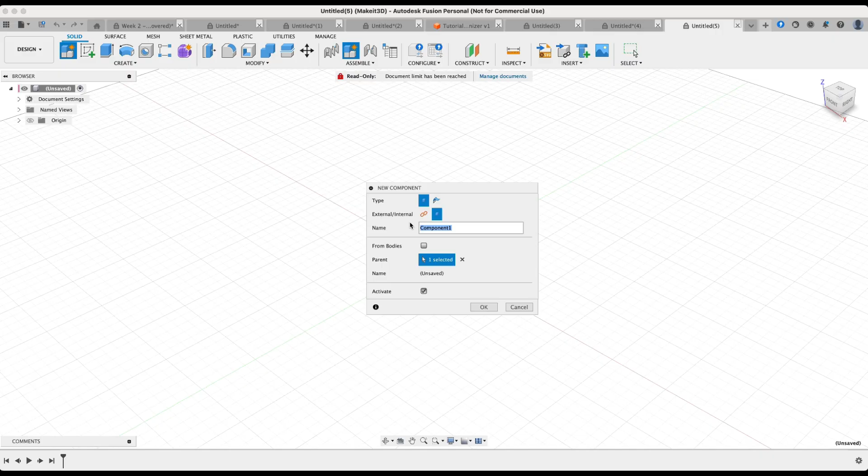Okay, so to get started with this design, the first thing we want to do here is hover over to the left hand side, click on Create, New Components, and let's go ahead and name this component to construction cone and press OK. The next thing we want to do here is draw a quick sketch. To do that, we can hover over to the left hand side, clicking on Create Sketch, then selecting the front plane here. From here, what we want to do is to create a center rectangle.

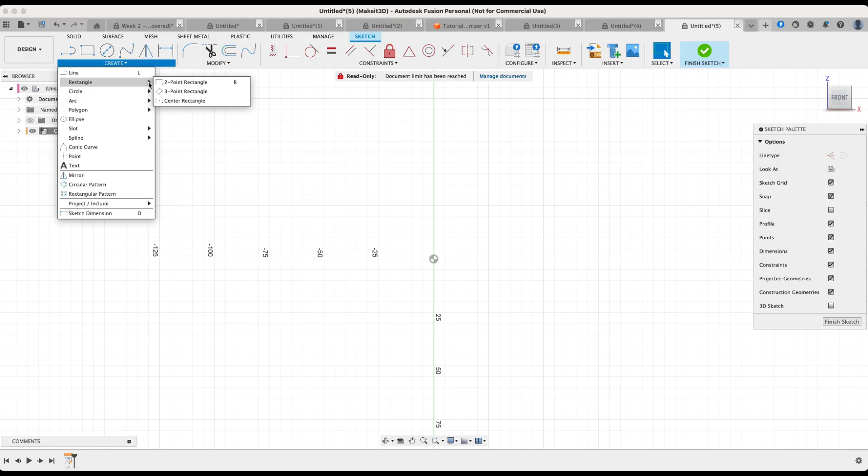To do that, we're going to hover over to Create, Rectangle, then select Center Rectangle. What this allows us to do is basically draw out a rectangle from the center point wherever we select within our canvas. So from here, we're going to draw out a center point from the origin and then just drag this out with our mouse.

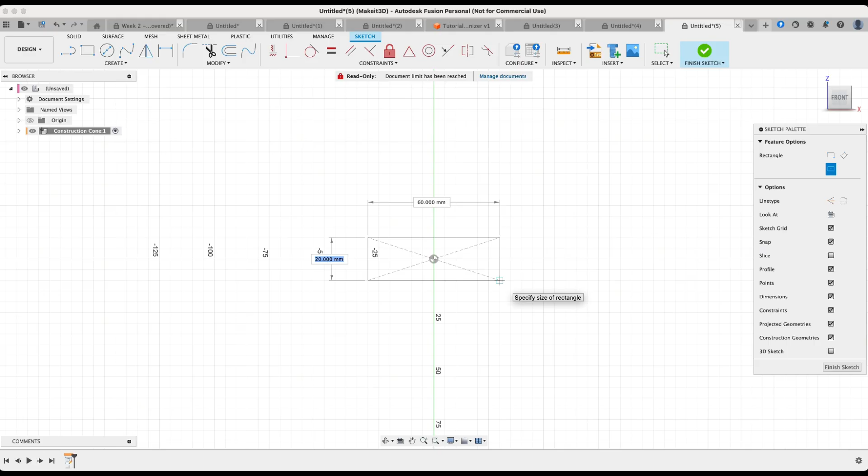Now on screen, you'll be presented with two different dimensions. The one as shown on the left and one as shown on the top, which is basically the width and the length. You could toggle tab on your keyboard to switch in between the two. I'm going to change the one on the left to around 2.5 millimeters. Pressing tab on my keyboard, which switches to the one on the top, I'm going to set this to around 40 millimeters. Once that's done, I'll press enter on my keyboard, then click on finish sketch.

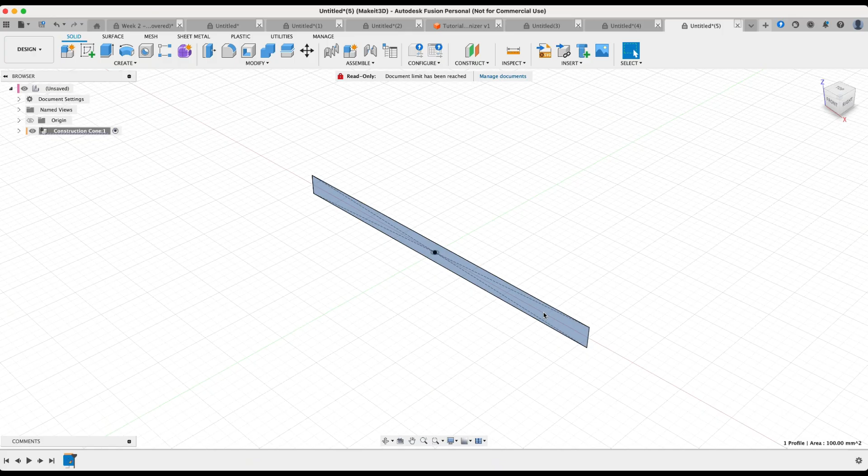From here, let's go ahead and zoom right into our canvas, selecting the profile which we created, pressing E on our keyboard, which basically allows us to extrude this profile, and you'll be presented with a couple of different options. The first thing I want to change here is the direction. We're going to change the direction from one side to symmetric.

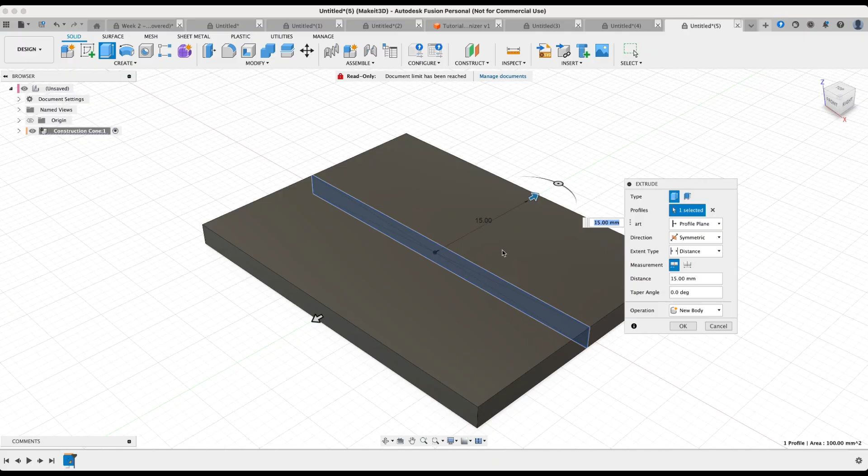This basically allows us to drag out this arrow on screen, and both sides will also represent the exact same value, meaning that if this is shown on the right hand side 15, on the left it will also show 15 as well. I'm going to stretch this out to around 20 millimeters and press OK. Once you have your value set to 20 millimeters, press OK on screen. And now you have a new solid body shown within Fusion 360.

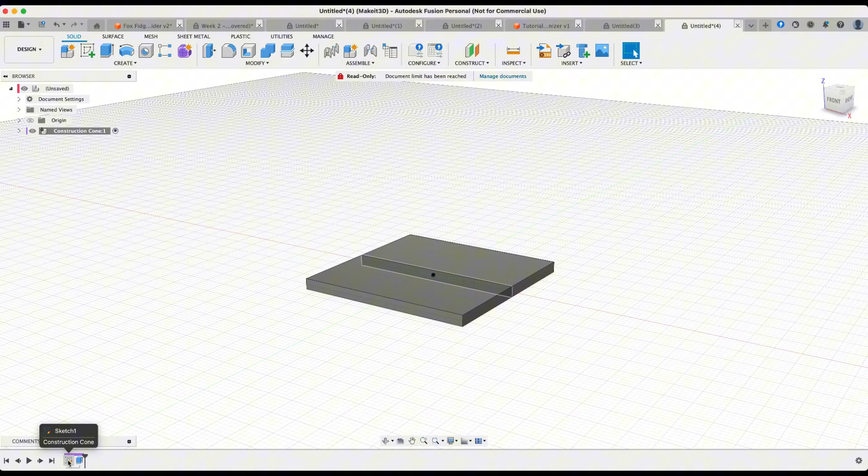The next thing we need to do here is to create the cone portion of our design. To do that, the first thing we could do here is double click on the sketch menu shown on the bottom left. Now, the cool thing about Fusion is that you can actually go back in time by double clicking on a previous feature that you added. Double click on this. And then the next thing we want to do here is to create the shape of our cone. To do that, we're going to use the line feature within Fusion by selecting line on the top left-hand corner.

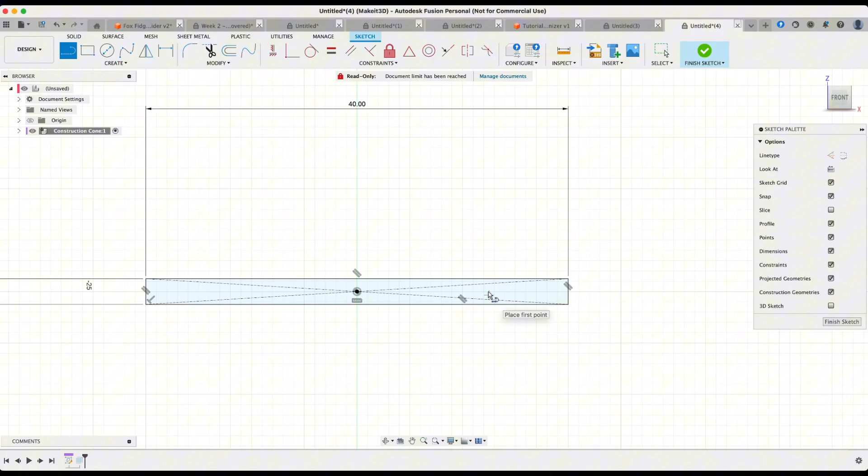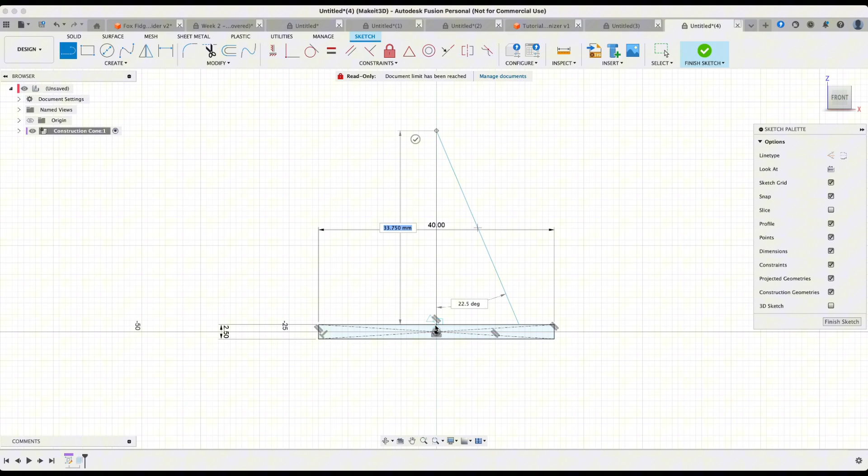Then from the bottom, what we want to do is drag out or draw a line anywhere along this path here. Selecting this line here and kind of just bringing this up to the very top. Now, it doesn't matter how high, we'll go ahead and set the dimensions later, but I'm going to set this to directly in the middle as shown on our green line here. Then dragging this back down all the way back to the bottom and press OK.

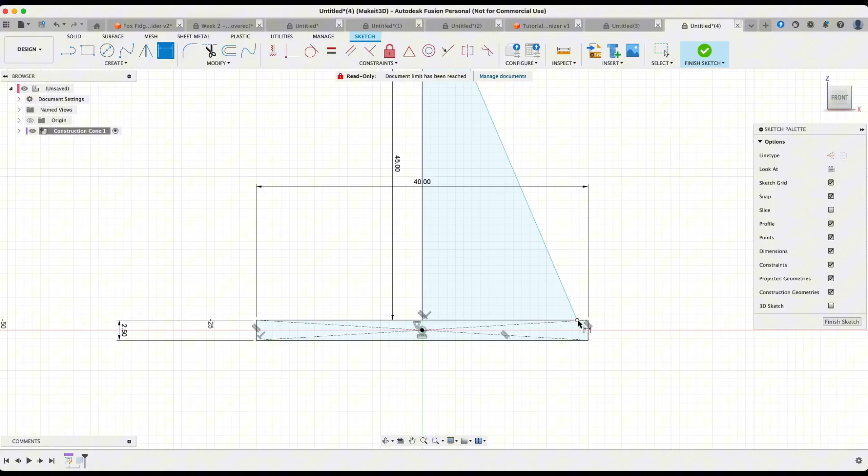From here, the first thing we want to do here is dimension the tallest line here. Pressing D on our keyboard, selecting this line here, and what we want to do here is set this value to 45 millimeters. The next thing we want to do here is set a dimension between this dot shown on the bottom right hand side and this edge here. Pressing D on your keyboard, selecting the bottom dot here to the right hand side, then let's set the value here to around 5 millimeters.

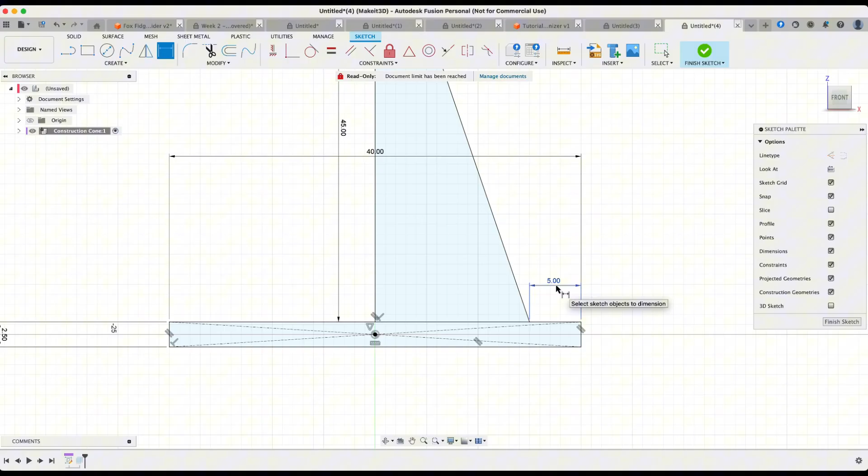What we've essentially done is set the distance in between this dot to this edge here to around 5 millimeters, then also creating a certain amount of height for the top or the largest line here. So that way we get an estimated or a much more proper size for our cone here. Now with that done, the next thing we need to do here is create a fillet because cones don't have a sharp edge at the very top.

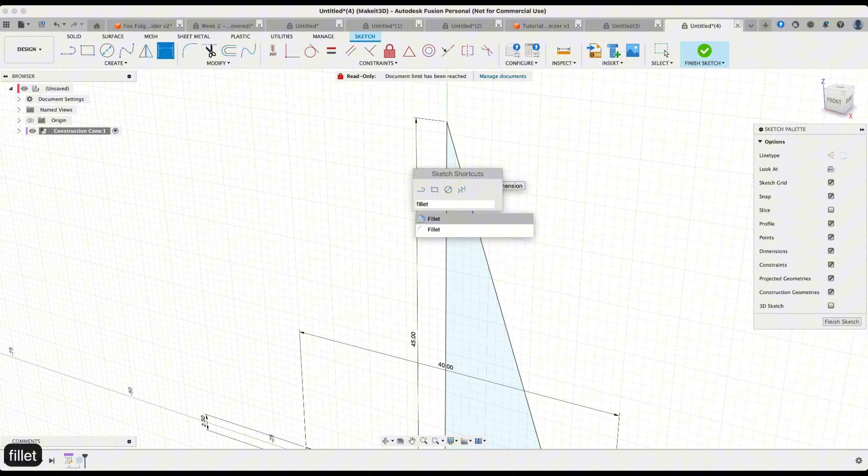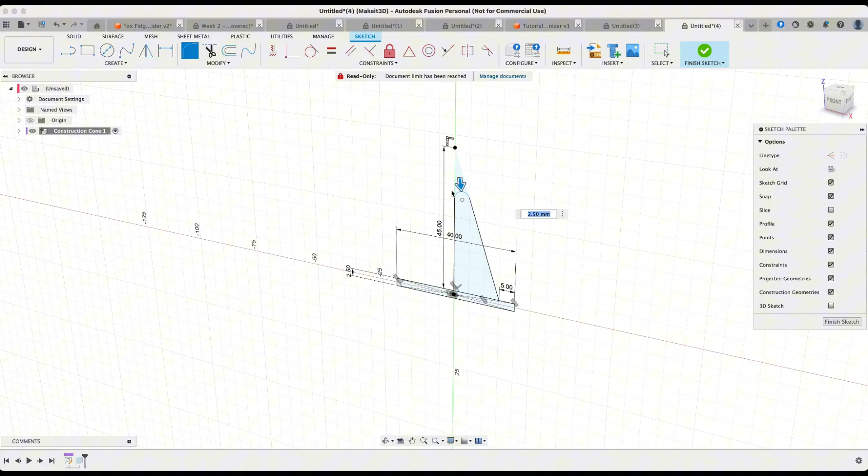To do that, we can press S on our keyboard, then type in fillet. We're going to go ahead and select the second option as shown as this line with kind of like a bluish curve here. Then selecting the top two lines here as shown on screen. And you should see that Fusion 360 might automatically change or move your fillet somewhere along this canvas. If it does, you can just move this arrow back up and kind of fix it so that way it doesn't stay all the way down there.

I'm going to set this value to around, let's just say 1 millimeter. Press OK. Now with that done, we can click on Finish Sketch. And now using this profile, we can press S on our keyboard, type in Revolve. And this allows us to select this profile on screen, select the axis.

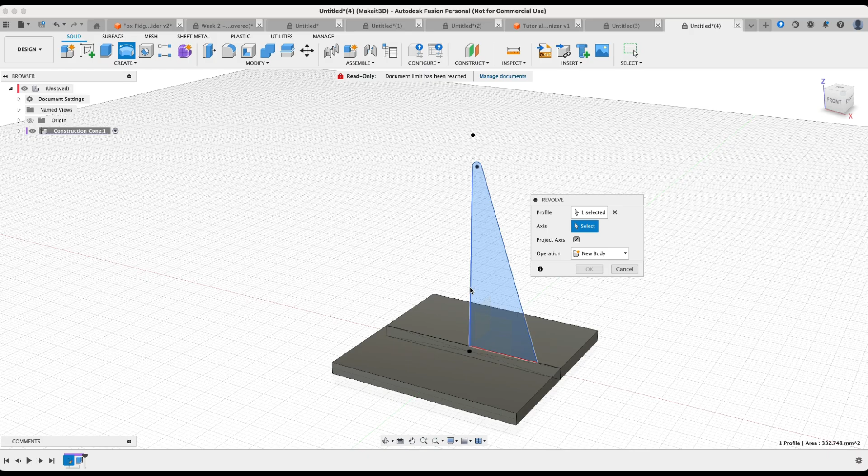We're going to use the green line once again, or the line here. And now we're basically able to revolve this profile, this 2D profile, into a 3-dimensional body. Once that's done, press OK. Now with that completed, we can go ahead and hover over to the left-hand side, toggle on our construction cone, toggle on sketches, and then turn off sketch 1.

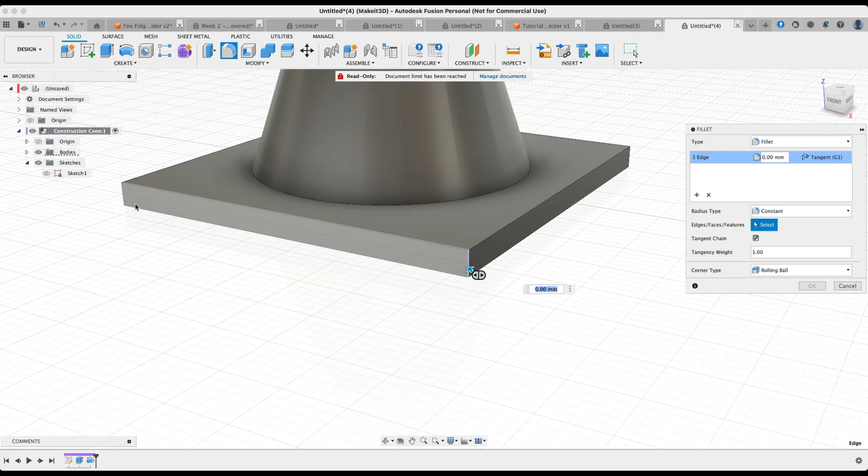Lastly, let's go ahead and add a fillet to each of these corners here shown on screen, pressing F on our keyboard. And what I want to do here is select each edge along our square. And I'm going to fillet this in to, let's just say, around 3 millimeters.

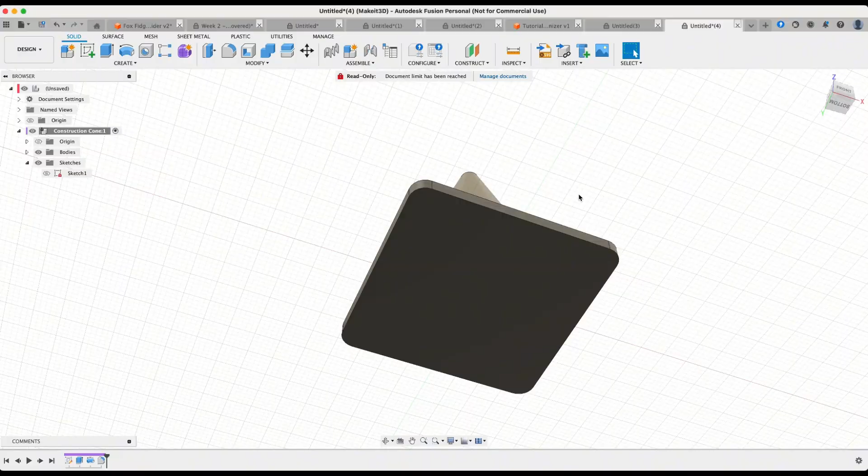Now with that complete, the next thing we need to do here is to create some sort of shell inside so we're able to stack the cones on top of each other. To do that, we're going to press S on our keyboard, type in shell, then select the blue icon here. From here, we're going to select the bottom face, and what this allows us to do is to basically create a cutout or an inside thickness, specifically inside this face here.

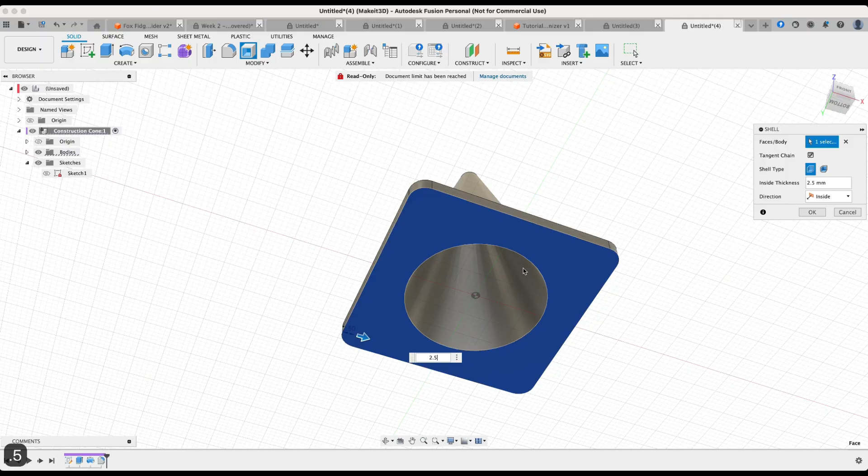I'm going to set the inside thickness to around 2.5 millimeters. Once that's done, it's basically created a cutout or an opening for our design, which looks good to me. Press OK. Lastly, the next thing we need to do here is to create some sort of offset. Now, the reason why we need to create some sort of offset is because just imagine if we were to try to stack these cones on top of each other.

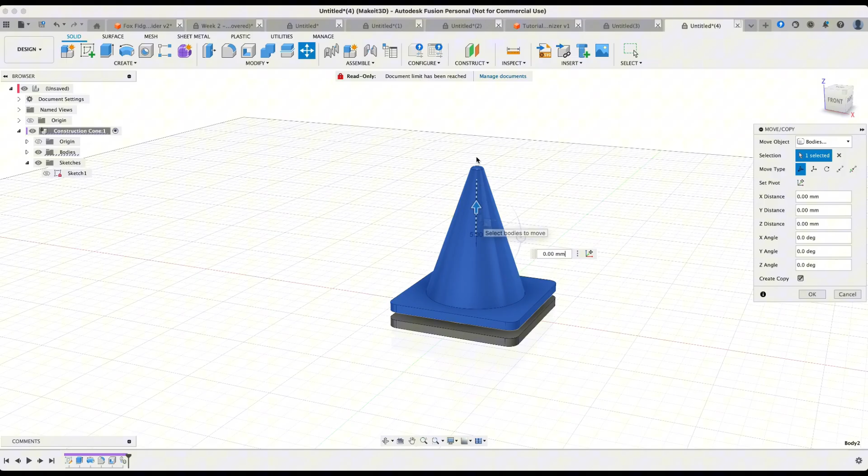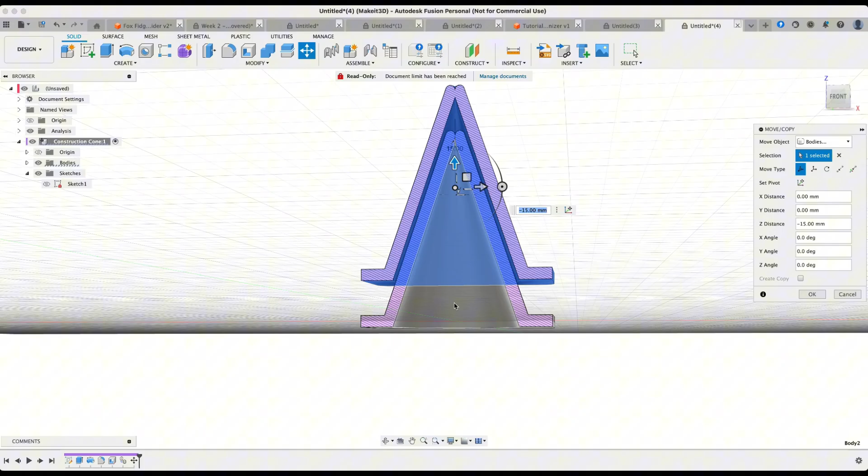Now, as an example, I'm going to go ahead and duplicate this cone myself. And as you can see, if I were to duplicate this, create a copy, then create some sort of section analysis, you can see that we want our cones to fit as much into our design as possible. But this leaves a lot of space in between here. Now, to fix that, we can actually use some sort of offset and press pull this, so that way you can create much more of an opening inside, so there's not that much space in between the two parts.

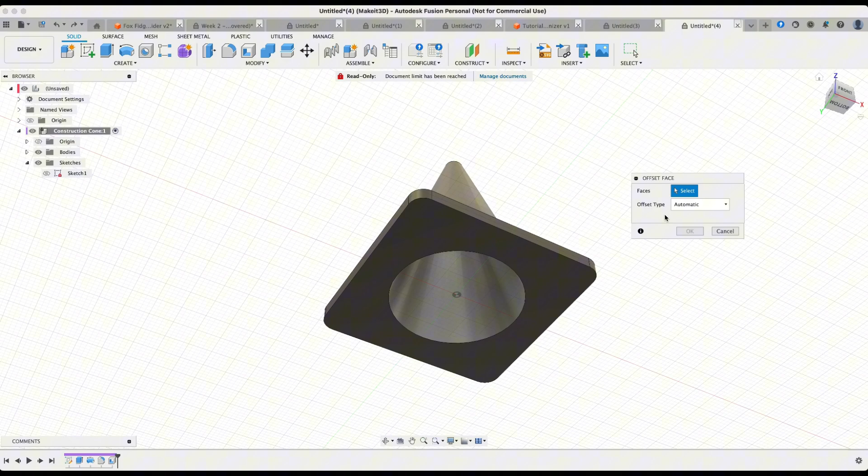To do that, what I'm going to do is right click on this inside face here. Then click on press pull. Now by default, it might automatically have it set to modify existing feature or automatic. I want you to select this to new offset. By selecting new offset, we're allowed to select this face and actually create a new offset for this instead of the existing shell that we created for our design.

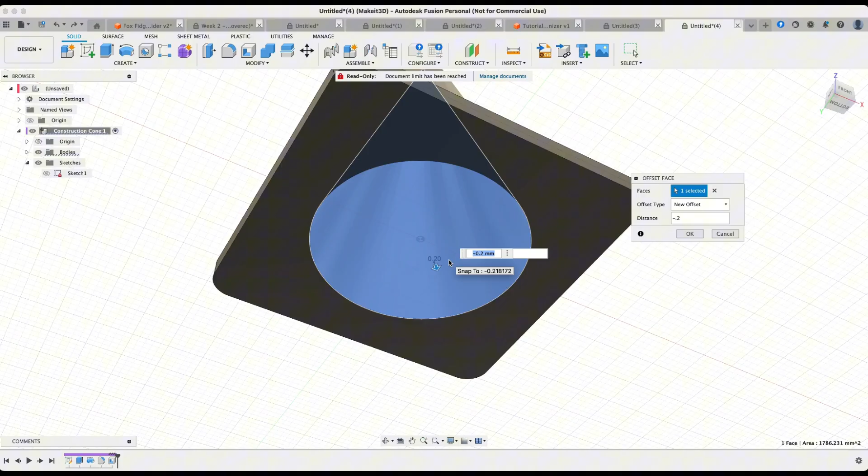I'm going to set the distance here to, let's just say, -0.2. And basically that's created a little bit more of a gap or an opening into our design. We can also change this to -0.4, creating a much wider opening for these cones to stack on top of each other. Keep in mind, this is not a necessary part to this design. Rather, we're just creating more of an opening so these cones can sit more flush into each other. With this value already set, press OK.

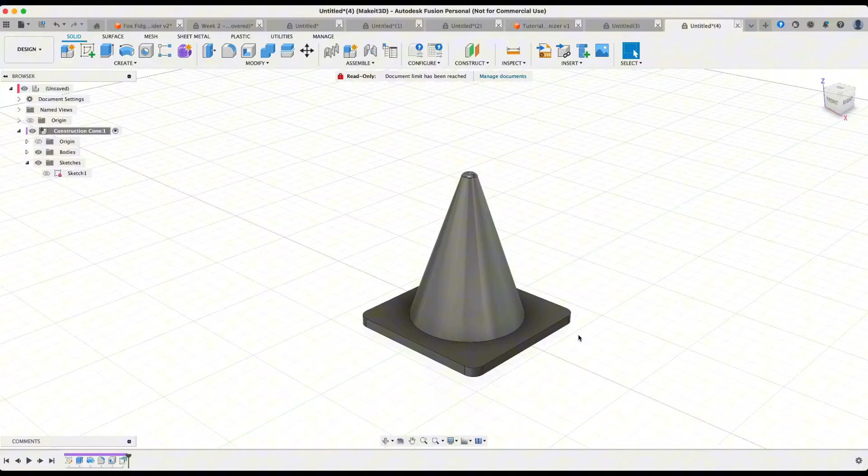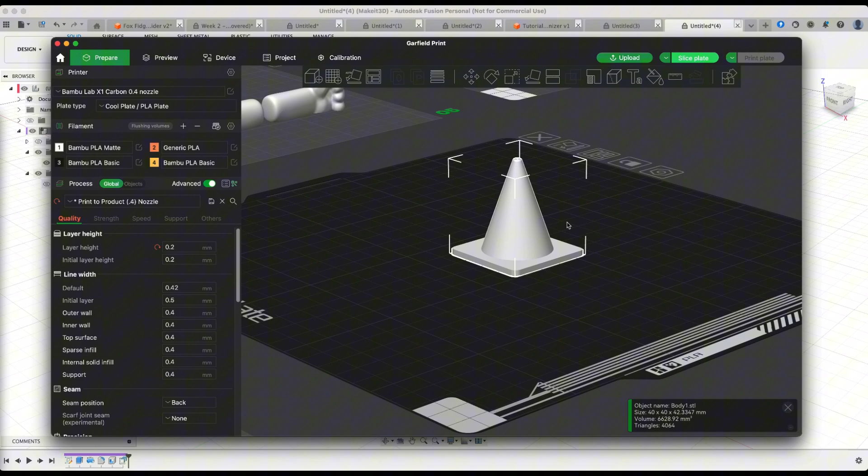The next thing we need to do here is export this to our slicer. To do that, we can go ahead and click on bodies, right click on body 1, save as mesh, and then press OK. From here, you may have noticed that we don't have the lines, more specifically the orange and white lines for our design here. Now, you don't actually have to add that within Fusion, because we can actually use this tool within Bambu Studio called layer height, more specifically when it comes to coloring this product.

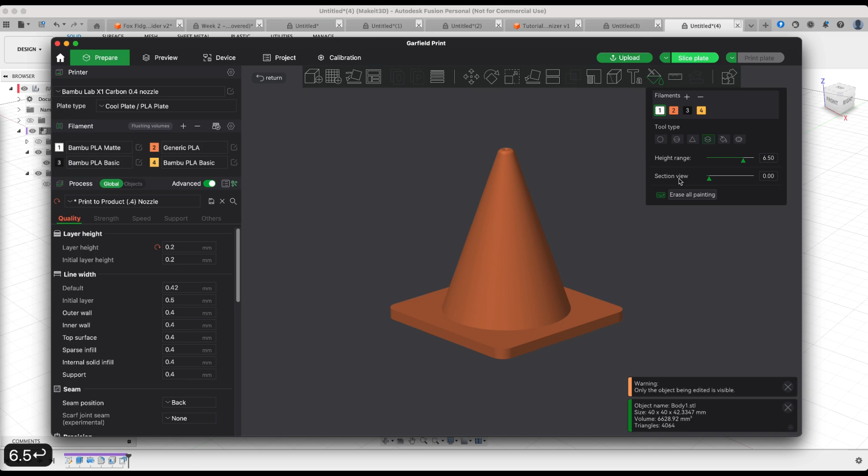So, for example, I'm going to set the color of this product to orange. Then I'm going to select this paint bucket tool on the top right hand side, select the shortcut key 1 or the white icon here, making sure you have the white filament loaded up, then also changing this to height range. I'm going to set the height range to around, let's just say 6.5. Now within Bambu Studio, I can go ahead and select a path along this body here and select anywhere along this path that fits where I want this pattern to be.

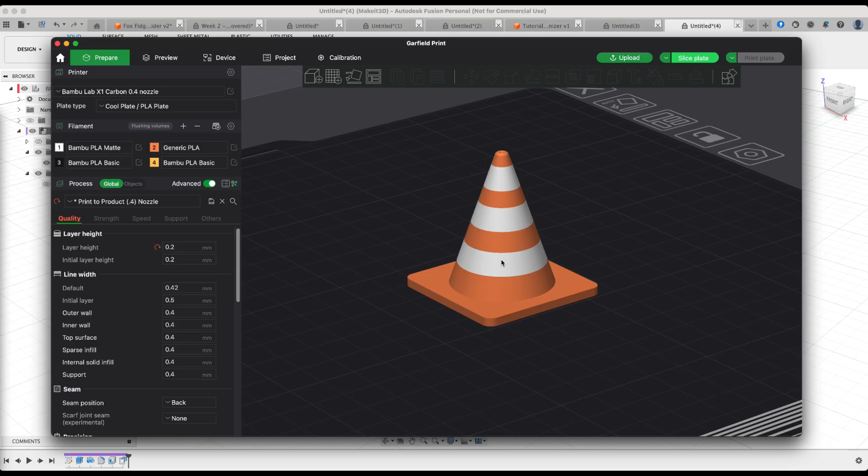And now with that completed, you basically have a construction cone fully designed within Fusion 360, ready to be 3D printed and fully multicolor without having to add on these separate pieces into this specific design. So with that said, that pretty much wraps up today's video. By the end of this video, you should have learned exactly how to design your own 3D printable construction cones inside Fusion 360.